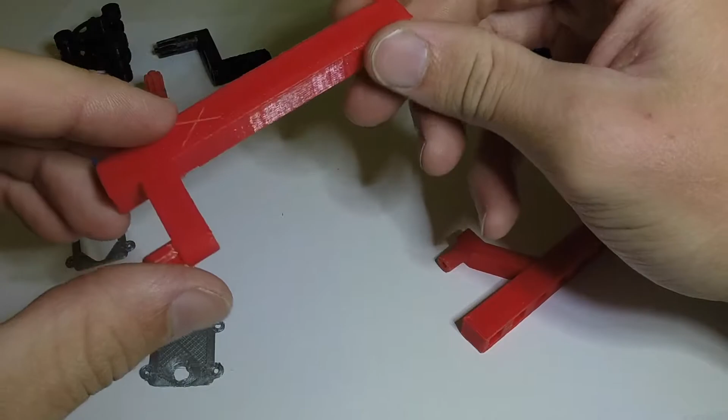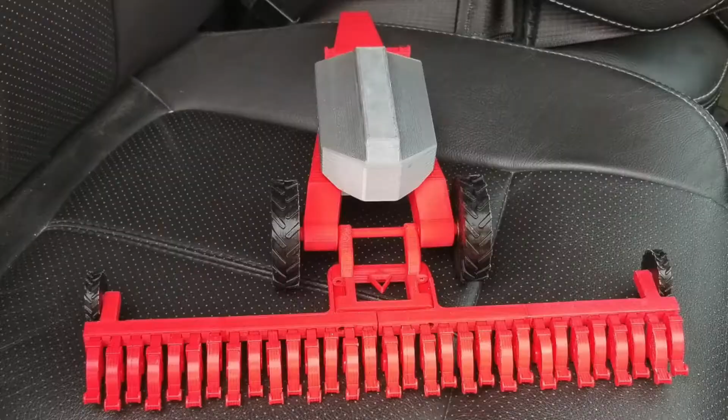I was making this model for a member of the company, and I was time crunched. I had 2 weeks to design this model from scratch and also print it, which took 53 hours to print everything you see here, plus another 11 hours of stuff I had to reprint, such as this.

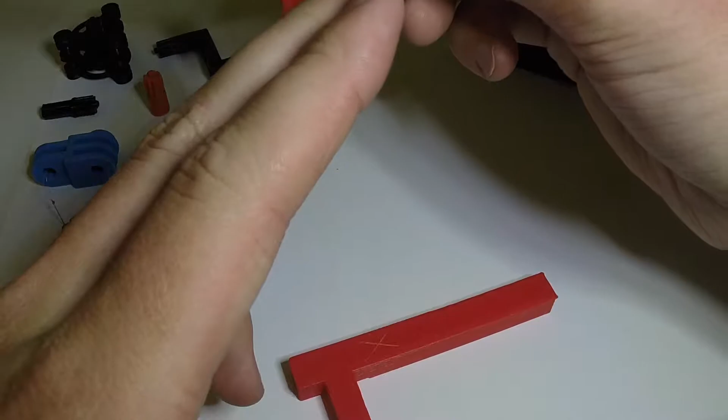This was the original model of the right side wing, the outer wing. I had to print these in 2 parts because my printer is really small. The first design I came up with didn't work. When these would go down and latch onto the arm holding bracket in front of the tank, the wheels would catch first, and that provided an issue. So I redesigned these to give me more clearance, quite a bit more clearance.

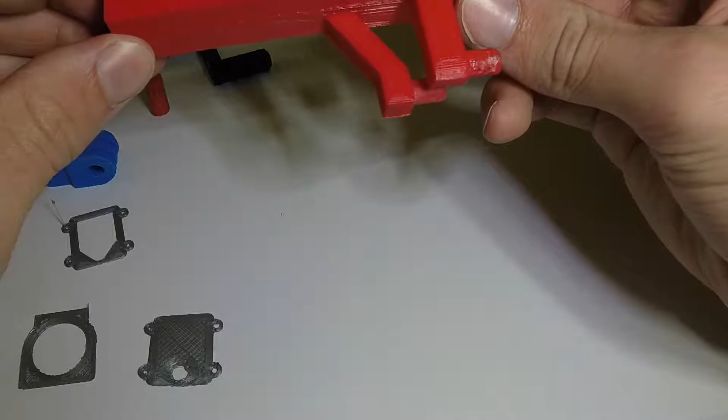I put the wheels further out on the arm, which isn't totally dimensionally accurate to the real machine, but it's the best I could do. I made this little notch so that when they were sitting on their proper rests, it would latch in place and not slide around. However, I realized that notch should be on the underside, so I changed it and reprinted it again.

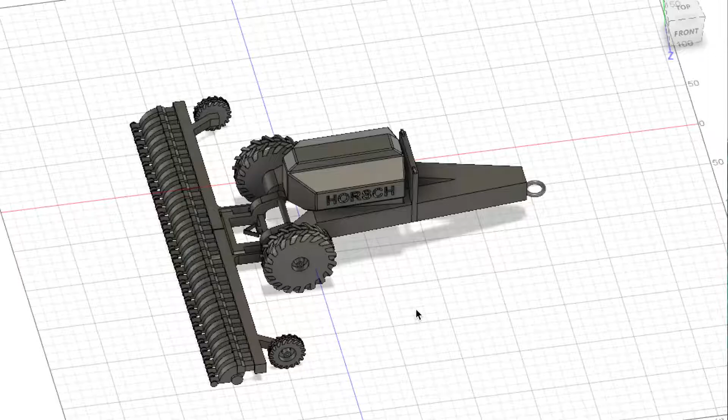Alright, so here's basically a mock-up model of the planter I originally designed. These are the version 1 arms. I didn't implement the updated versions into this model; I just made this to piece together what it would look like before printing it. You may notice all of these row units, there's 31 of them, and I believe 16 are a longer distance away from the main arms here.

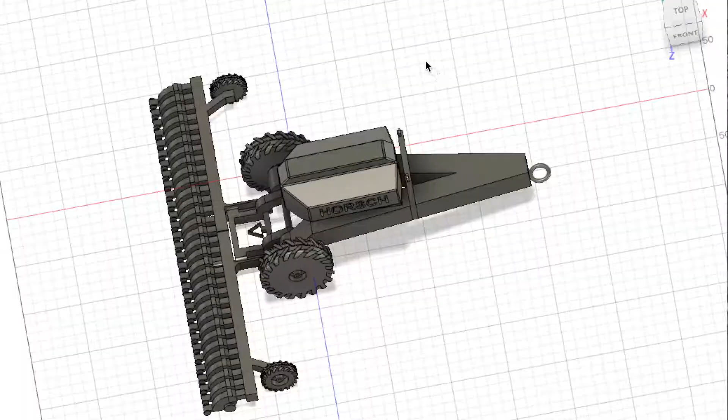So this is the basic SketchUp of what it looks like, and here's the place where the arms would secure onto the chassis.

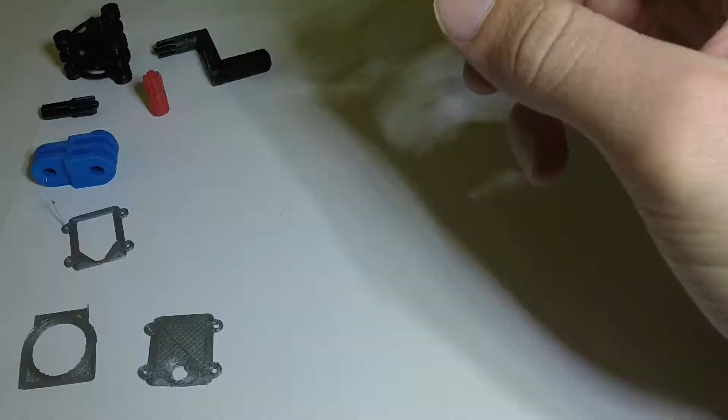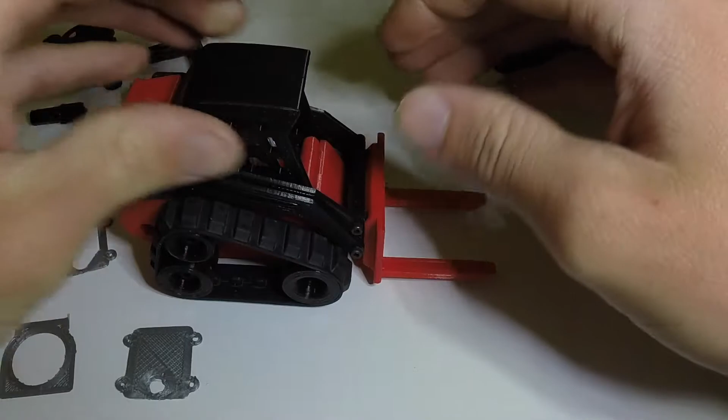So that was the second major build I worked on, and the first one would be this little guy. This is a remote control skid steer, basically 3D printed the whole thing, other than these rubber tracks—I can't print rubberized materials on my printer yet.

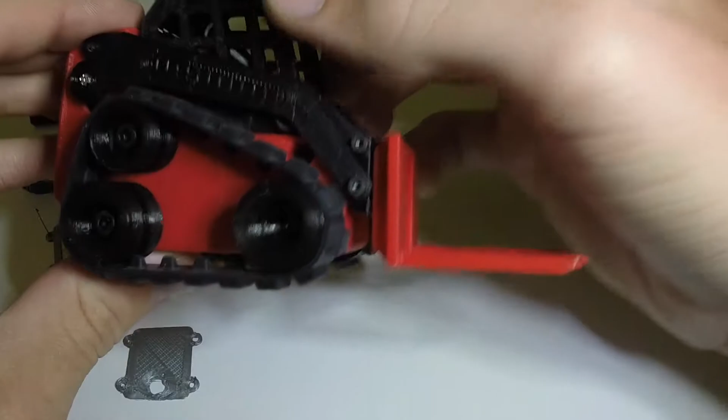I might in the future be able to do that. The rubber tracks I did not print. There's a few screws, bolts, and some nuts in there, an embedded nut, and there's also 3 servos on the inside of this body.

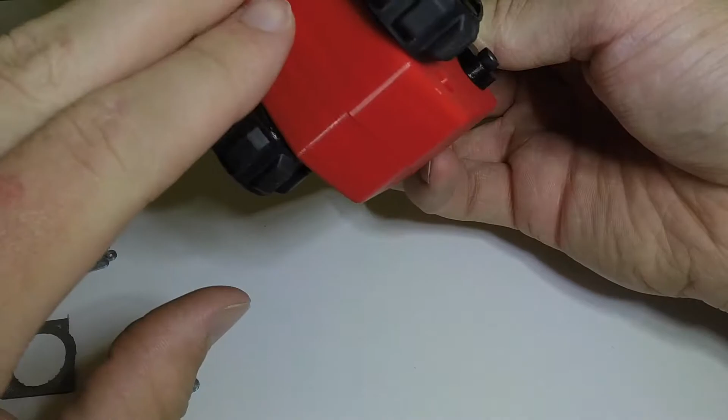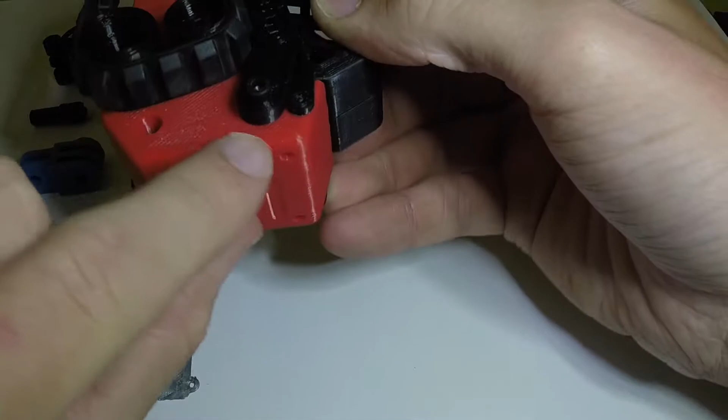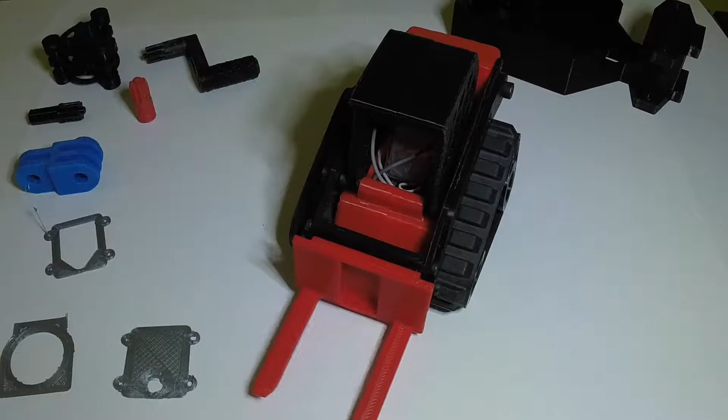So there's one here driving this track, one here at the back driving this track, and one in the back here that lifts the arm up and down. This is on Thingiverse, you can find these files, they're free to download. As you can see, the arm lifts up and down, and it's very slow and a little noisy, but it does drive.

I'm sure you could get it to go faster with better servos, but in order to enable the tracks to spin 360 degrees continuously so it could drive, I had to modify it—cut the potentiometer wires so the servo didn't think it was moving. Sorry, here, I'll just try and trim it so it doesn't move.

This was the first major build. It didn't have a lot of parts and wasn't really complicated. There were building instructions for me; I just had to piece together the pieces. But let me unplug this. There we go. Set that off to the side.

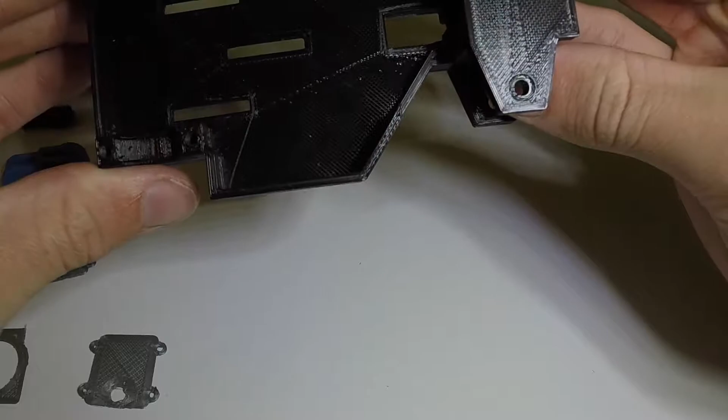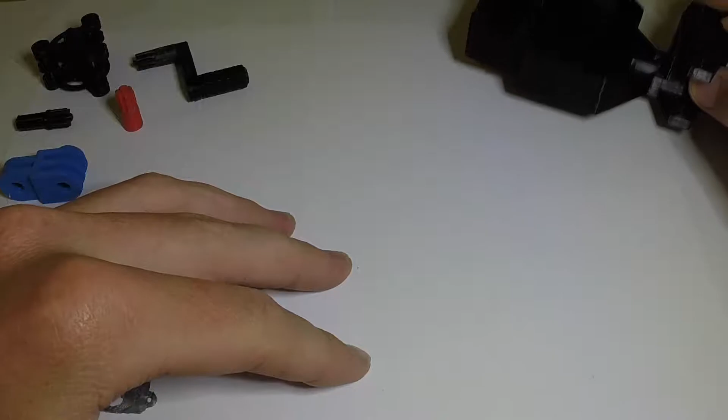Speaking of the RC car chassis, Tom Stanton on YouTube 3D prints models, and he used to do some planes and stuff, electric bikes, bicycles. He recently started developing a compressed air engine that was 3D printed, and I was very interested when he started, but his files weren't available for free—you had to purchase them. However, he recently decided to release his files for free on Thingiverse, and I was going to print them.

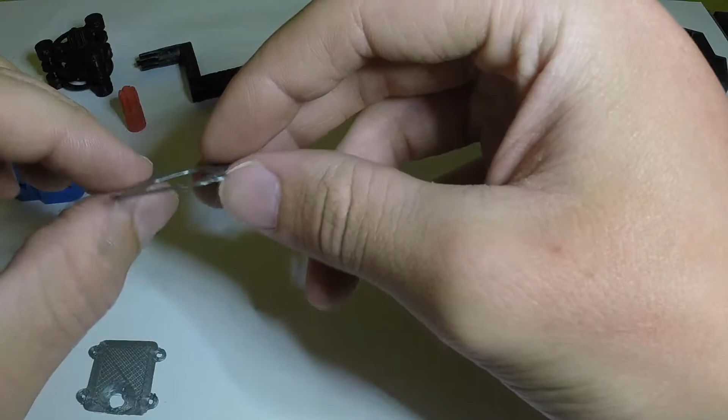But he requires a very small 0.2 millimeter nozzle, and most printers come with 0.4. So while I'm waiting for a smaller nozzle, I thought maybe I'll just print it with the nozzle I have and it'll be okay. I don't think it really would be. So this is the crankcase—I believe this is the front of the crankcase, and then this is the cylinder and the cylinder head.

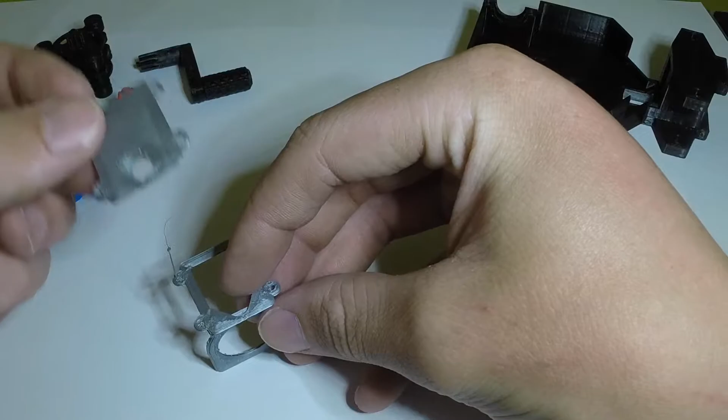So I started printing these, and as you can see, the top layers were getting messier and messier. The bottom layer started out fairly nice and even, but the top layers got very messy. So I canceled it and decided to wait.

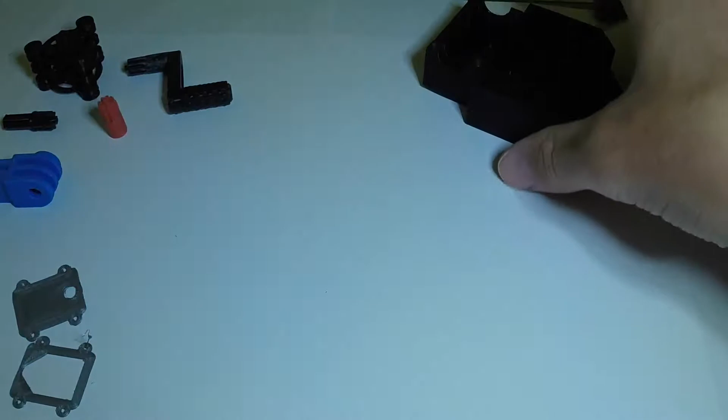But meanwhile, I designed a chassis for this engine to go in. Hopefully—I obviously don't have a full model of the engine other than digital, so I put it into Fusion 360 and tried measuring points and coming up with a gear to put on the crankshaft, as well as mounting positions similar to this, but it goes directly into the bottom of the crankcase.

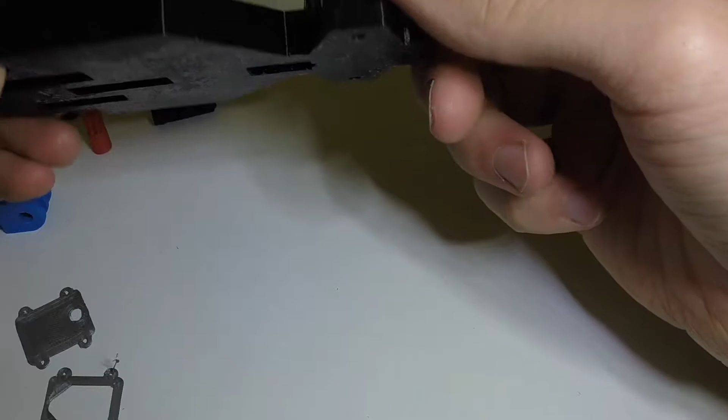And then I designed a rear axle with a gear on one of the wheels, as well as a solid front axle on the frame, and wheels to put on the axle. Of course there will be 2 bearings on the rear axle and 1 bearing in each of the front wheels. This will just be a simple first test—if it comes out nice and works out, it'll just go straight and run off a water bottle filled with compressed air. So let's go take a look at that model.